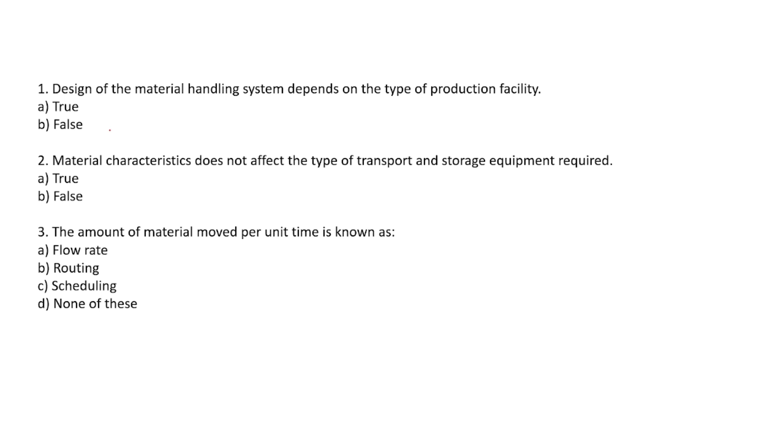Then the next question is: material characteristic doesn't affect the type of transport and storage equipment required. Okay. We have seen that material characteristics have a significant impact on the type of transport and storage equipment. For example, if the material is hazardous, or requires a controlled environment, specialized equipment may be necessary to transport and store it safely.

So weight, size, shape, and fragility of the material, as we have talked about, affect the choice of equipment needed to transport and store it. That is the reason material characteristics should be carefully considered when selecting transport and storage equipment. So the statement given here should be false. Material characteristics do affect the type of transport and storage equipment required. So the correct option will be B, false. Okay.

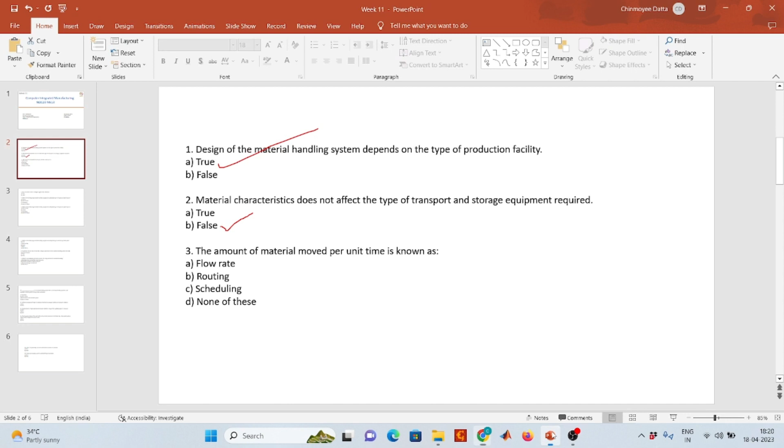Okay. So just a minute. Okay.

So the next one is routing. That is like pick up and drop off locations, move distances, then routing variations. And the next one is scheduling. That is the time of each delivery. So delivery when it is required, or use of buffer stocks so that it can mitigate against late deliveries. So that is called flow rate, routing and scheduling.

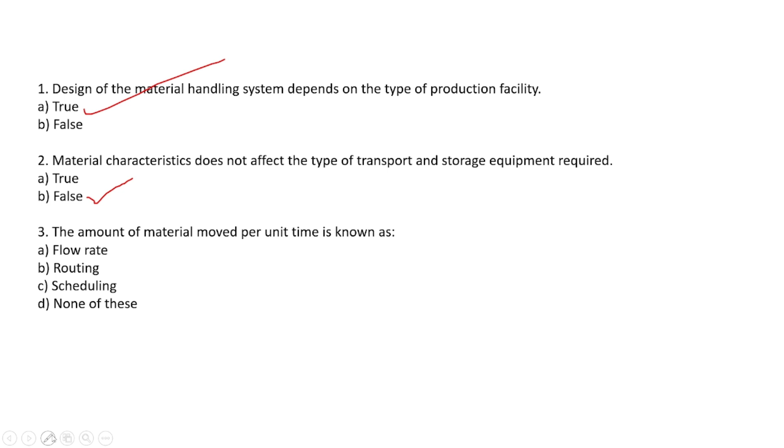Now one question is given here: amount of material moved per unit time is known as. So just now I have talked about that. So the right option will be flow rate, right? We have seen here that the amount of material which is moved per unit time is called flow rate. Okay.

We use buffer stocks to mitigate against. Next question is given as a statement that we use buffer stocks to mitigate against late deliveries. So we have talked about that, right? In scheduling. So it is the true option only. Basically, to mitigate or avoid late deliveries, buffer stocks are there in the industry or manufacturing lines or plant, so that it can avoid late deliveries. So the right option would be true.

Okay, so next, we have seen flow rate, scheduling and all those terms which are being used in material handling. So now we'll talk about equipments which are being used in material handling. So if we talk about plant layout, material handling equipment must be included in plant layout design. So plant layout types are there, like fixed position, process layout, product layout.

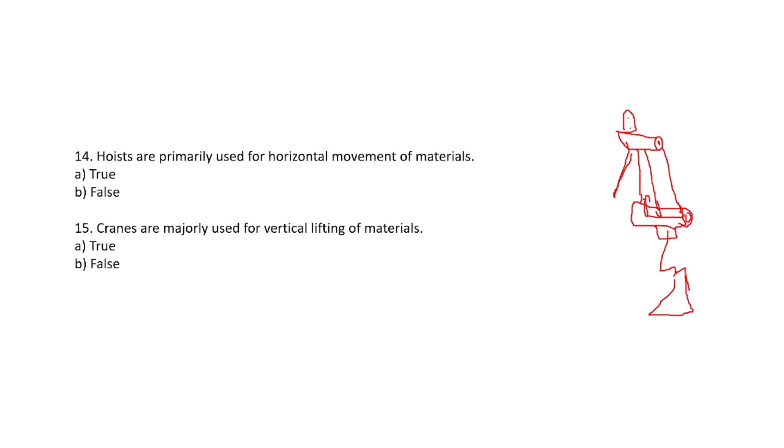So this is, we can say, the load. So the force will be in that direction. That is the flow. So this is a kind of force, and if we talk about cranes, as we have seen, it is being used for

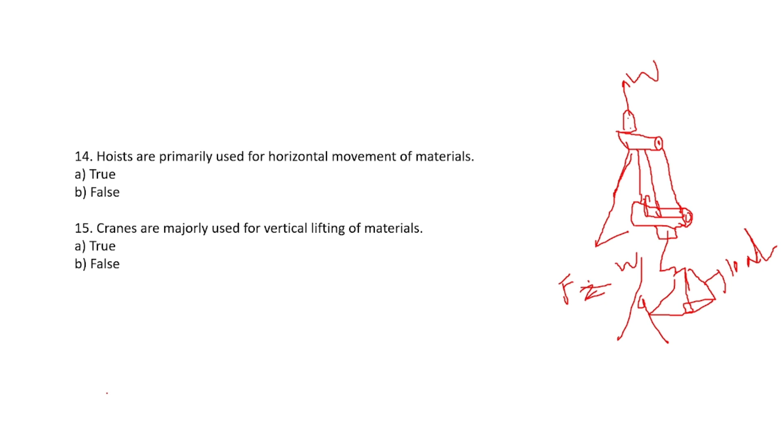vertical lifting of material. So bridge cranes are there, half gantry crane, then jib cranes are there. So if we talk about cranes, say for example,

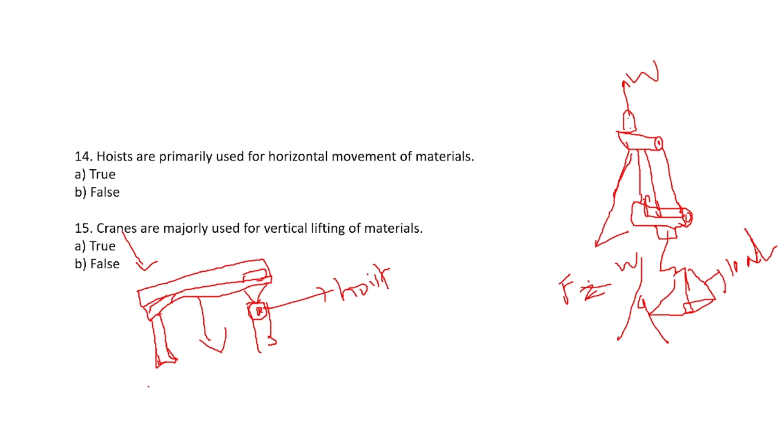so basically in the crane and hoist combination, as we have seen, the crane includes the hoist. So here the hoist is included for vertical lifting of material, and that is the crane rail, that is for horizontal movement. Okay, so this is the example of a jib crane.

Okay, so one question is given as: hoists are primarily used for horizontal movement of material. Is it true or false? Obviously it is false, right? From the example and from the sketches also we can refer. Hoists are used for vertical lifting of material.

That is the reason in the crane and hoist combination, the crane includes the hoist for horizontal transport, and the hoist does the job of vertical lifting and lowering. So the correct option will be false.

And cranes are majorly used for vertical lifting? No, cranes are used for horizontal movement of the material, and hoists are used for horizontal move. Sorry, hoists are used for vertical lifting of the materials. Okay. So horizontal transport support is given by the crane rail, and the hoist is for vertical.

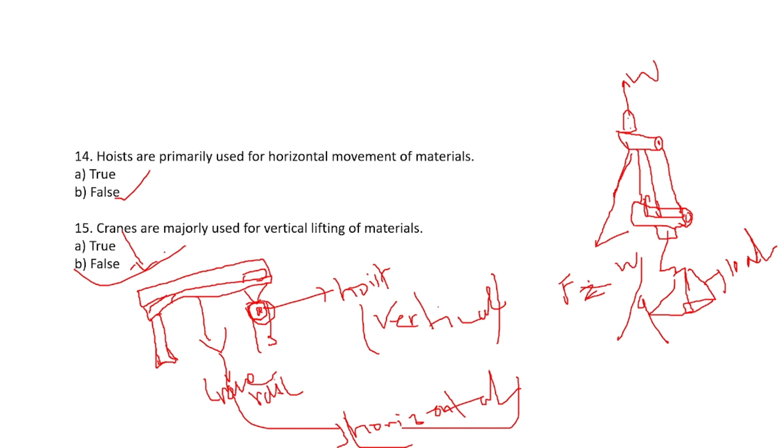Okay, so the right option will be B for question number 15. So those are the few questions I tried to explain so that we can get an overview of material handling and the content being discussed in the lecture notes.